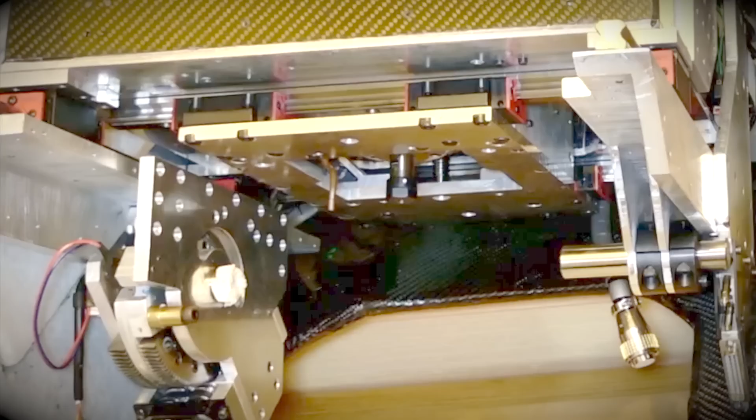Solving the soundproofing box issues, improving the lack of power, and revealing the C-axis performance beyond imagination.

This is bad. It's definitely going to break someday. If we wait until it breaks, fixing it will be a real pain. I need to do something about it now. There are just too many problems.

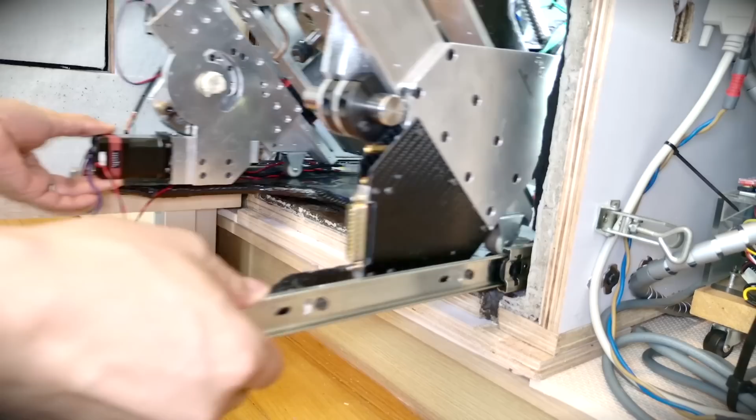Hey, freak. What's wrong? Did something go wrong again? I just love seeing you struggle.

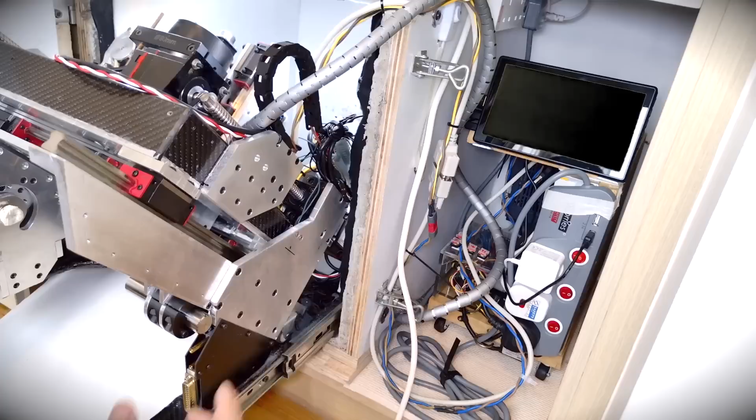Hey, Angel. I've been thinking. I'm a little worried that the slider on the soundproof box might break someday. I found this slider at a local DIY store, and I thought it would be cool if I could use it to pull the machine out of the box. And yeah, it worked, but the machine has gotten pretty heavy, and it's only going to get heavier, so I'm kind of worried. Yeah, it does look cool, but this slider looks like it might snap. How heavy is it? I don't really remember, but last time I checked, it was over 20 kilos.

The biggest column isn't even done yet, and I haven't built the C-axis either. It's only going to get heavier. Plus, my workspace is ridiculously small for building this insanely cool 5-axis CNC machine.

To make the most of the space, we'll probably end up working on top of this slider a lot. When that happens, there will be times when it takes more force than usual, which means it's even more likely to break. So basically, this problem happened because you went ahead without a plan.

Well, that's just who you are. Watching you mess things up is what makes it fun.

No, you've got it all wrong. The viewers are amazed by my flawless work and brilliant ideas. I have the determination to solve any problem and the genius mind to back it up. The word that suits me the least is failure.

Probably. Oh, I see. So, does the genius freak have some ridiculously genius solution? Let's ask Ultimate GPT, the latest AI chatbot I built, for the solution.

Already relying on AI. Didn't we declare that AI a failure in the last video? No need to worry. After the last video, I made perfect adjustments, so now it can provide concise and flawless answers. Now, let me show you the specially optimized Ultimate GPT.

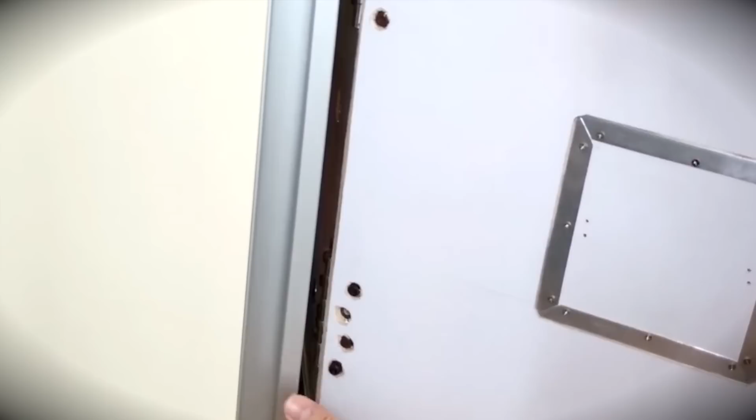Don't worry. My genius ideas are just beyond the understanding of ordinary people like you. It's not your fault. I'm just a genius. Oh, really?

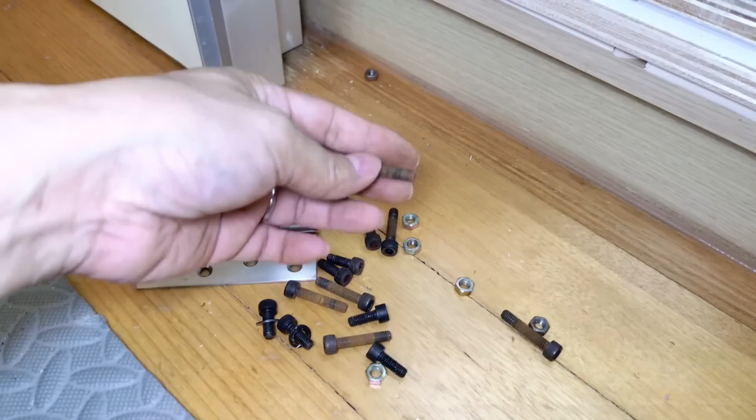Wait, you're making it open downward. Yeah, that's right.

I have no idea what you're trying to do. You'll see soon enough. Just stay quiet and watch my brilliant work.

I'm starting to see what you're trying to do.

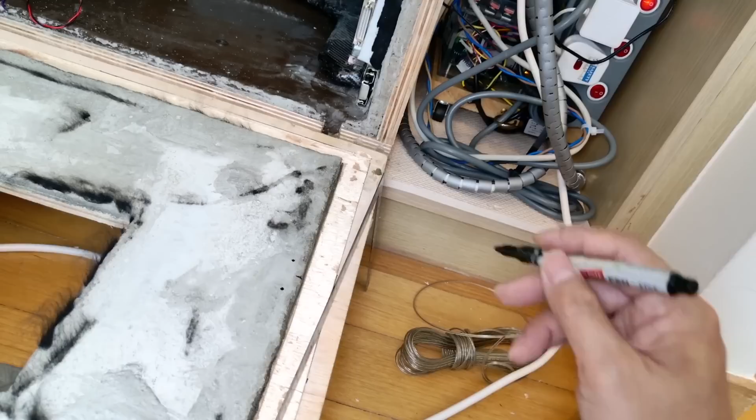Why the creepy looking legs? I've been jogging lately, and I think my legs have gotten more toned. What do you think? Disgusting.

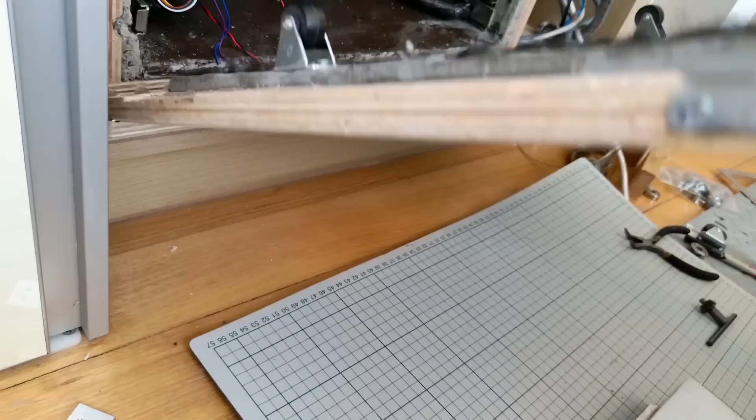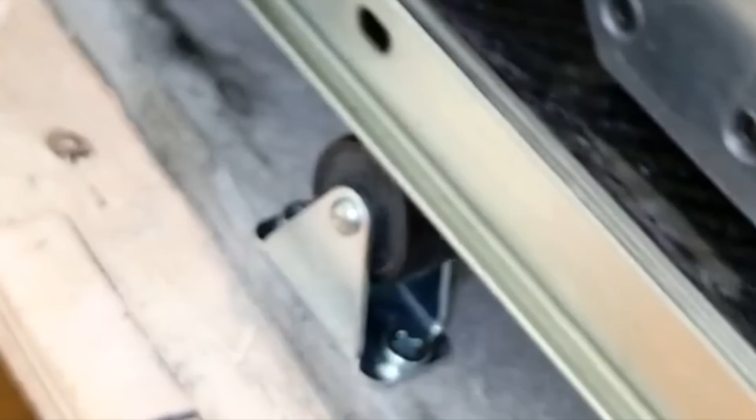It's finished. No one but me could have come up with such a groundbreaking system. These rollers support the slider. Let's run a test. Perfect. Now, even if the machine gets heavier, the slider won't break. Not bad, but it's just okay.

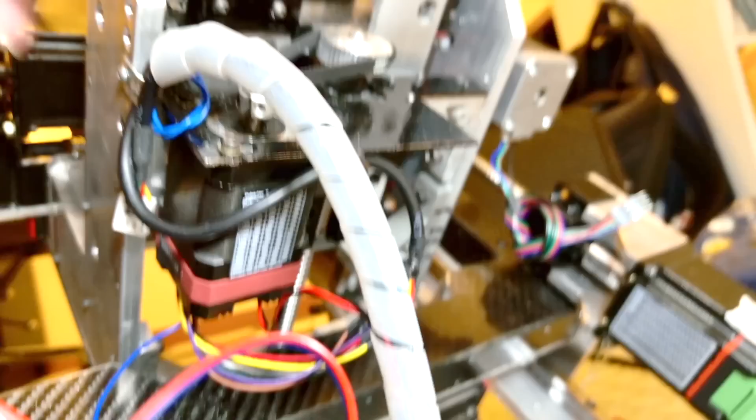Next, I've decided to replace the X-axis and Z-axis motors with more powerful ones. Why did you decide to change the motors? You just finished wiring them last time and finally got them running. Did you already break them? No, I haven't broken it yet.

As for why I'm replacing the motors, I found that the Z-axis motor is underpowered and moves erratically. This is probably because the motor is experiencing a heavy load, causing it to lose steps. The encoder detects the lost steps and tries to compensate, but it doesn't seem to be correcting it properly. Luckily, there's enough space where the motor is mounted, so I decided to swap it out for a slightly larger one.

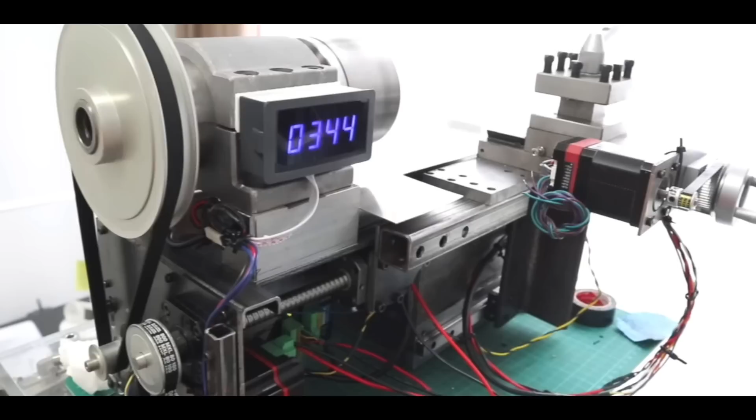As for the X-axis, there's a different reason. Actually, when I built a CNC lathe before, I debated whether to use a servo motor or a closed-loop stepper motor for the spindle drive. In the end, I bought both, but I decided to go with the servo motor.

You just had a bigger stepper motor lying around. Simply put, yeah, that's pretty much it. Besides, there's plenty of space to mount this bigger motor. Using a motor with enough power helps prevent issues. Alright, let's install it.

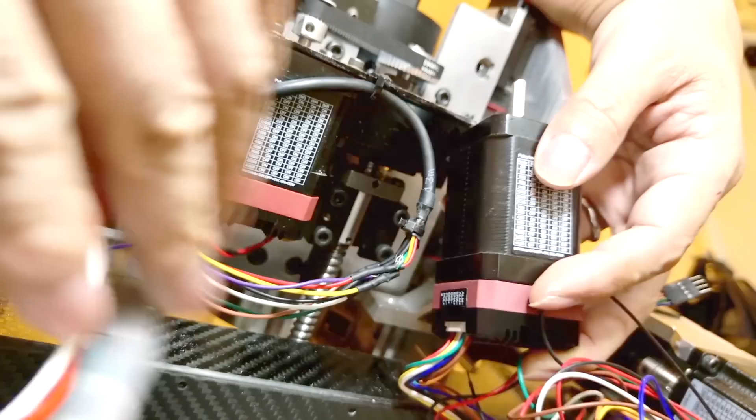Ultimate, explain the stepper motor replacement.

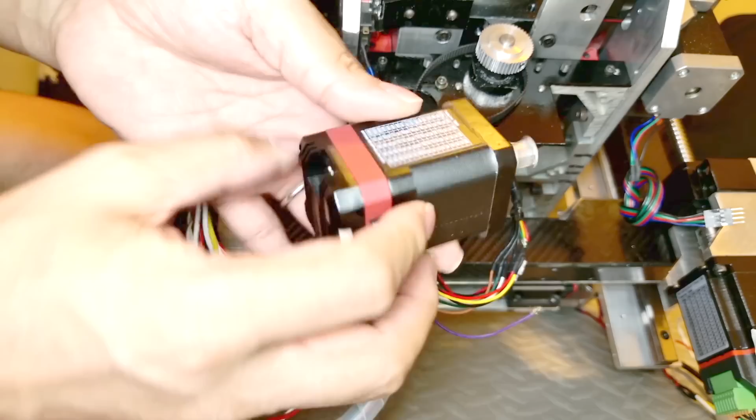Today, we're upgrading from the ESS42P1X48 into the ESS42P2X60M stepper motor. The main differences between these two models are size and torque. The new ESS42P2X60M is 12mm longer at 60mm, allowing for a stronger internal coil and magnet. As a result, it delivers higher torque, making it more capable of handling heavier loads. This upgrade is particularly beneficial for the Z-axis, where load fluctuations are common, helping to prevent step loss and ensuring

Smoother, more stable operation. Thanks, Ultimate. Since it was just a motor swap, there was nothing particularly difficult about it. Alright, let's run a test.

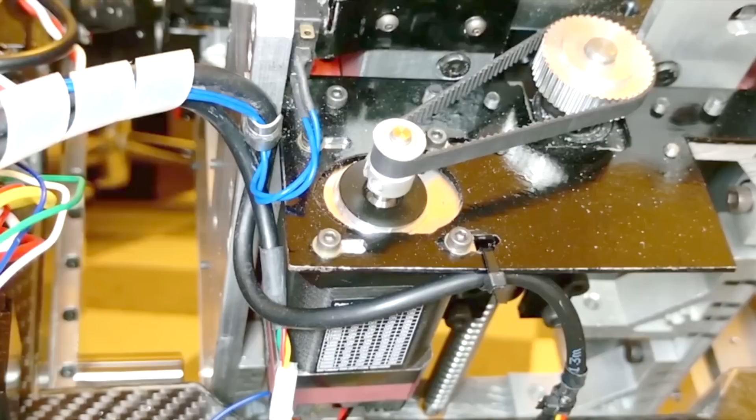The Z-axis seems to be working fine. I think it has enough power.

Next, I'll replace the X-axis stepper motor. This one is significantly larger than the original motor.

Today, we are upgrading from the Hybrid Servo Nema23 closed-loop stepper motor, 1.2 Nm, to the Nema23 integrated stepper servo motor, 3 Newton meters. The key benefit of this upgrade is a significant increase in torque. The new ICE 573630 motor delivers 3 Newton meters of torque, up from 1.2 Newton meters, providing about 2.5 times more power. With a rated current of 5.0A, it can handle higher loads more effectively.

This upgrade is especially beneficial for the X-axis, where fast movements and load changes occur frequently, ensuring more stable and reliable performance. Thanks for the explanation, Ultimate. Alright, let's run a test.

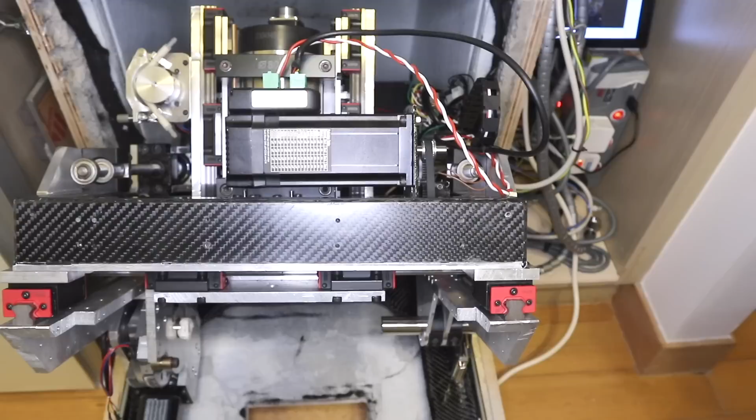It feels really powerful. The stepper motor sounds pretty loud. Why is it so noisy?

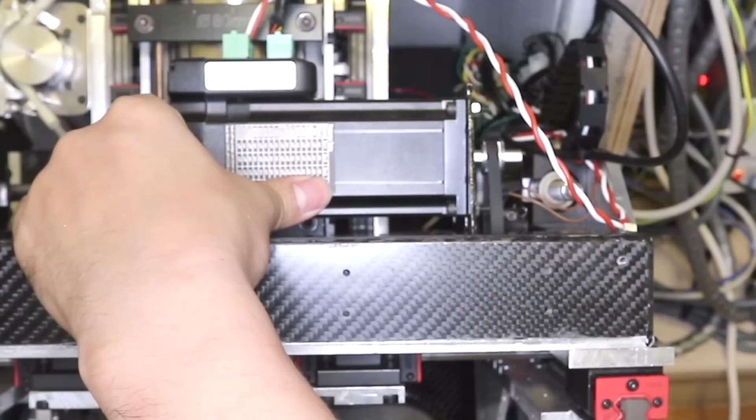There are several reasons why bigger stepper motors tend to be noisy. First, stepper motors inherently produce vibrations and noise due to their design. Larger motors have increased rotor and stator mass, which amplifies resonance during operation, leading to louder vibrations. Additionally, high torque motors require stronger current pulses, which can cause coil and housing vibrations. This is especially noticeable at low speeds, where the motor may produce a grinding or chattering sound. The driver settings also play a role. If the microstepping setting is too low, each step becomes more abrupt, increasing vibration and noise. By adjusting the current settings and gear reduction, the noise can be reduced.

Next, we move on to the most important step in this video, adjusting the C-axis. But before that, there are still some unfinished parts, so I'm working on them now. Where it goes will become clear as you watch. As I'm making the parts, I'll also explain this machine's uniquely designed C-axis.

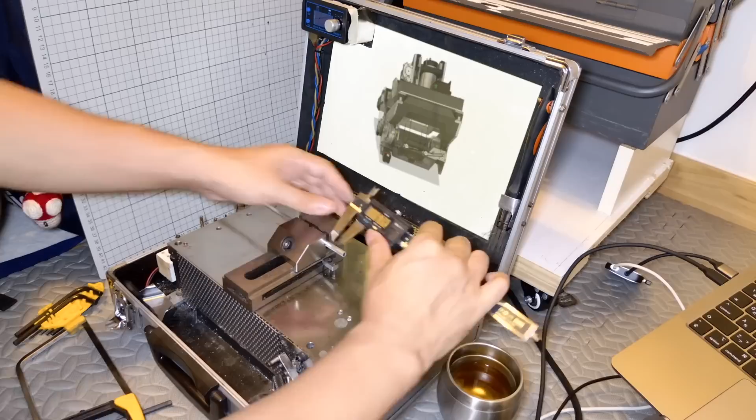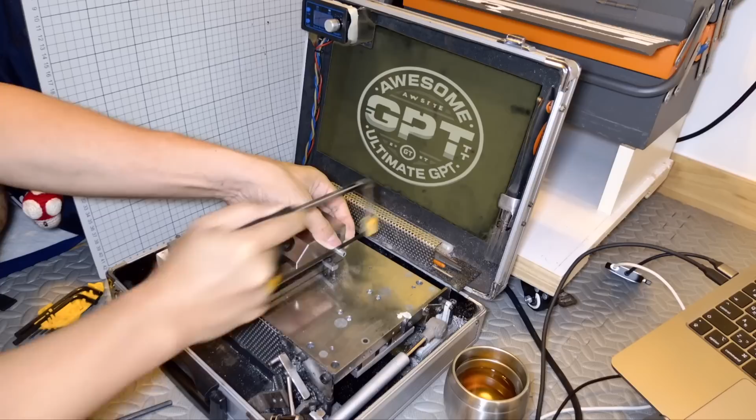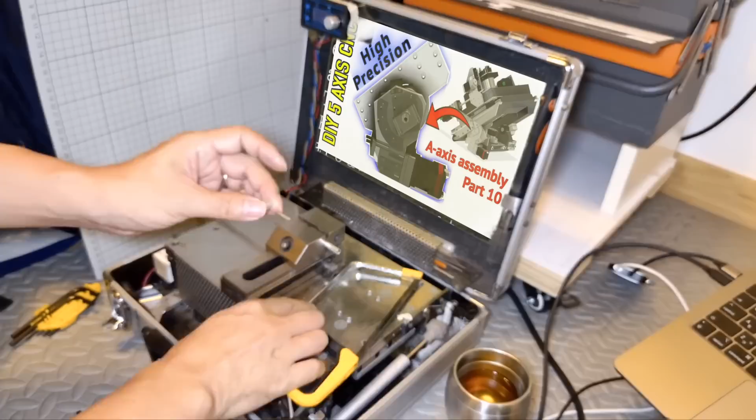Didn't you post a video before explaining the structure of the C-axis? Why not use that to explain it? Yeah, that's right. Looks like you're finally starting to get smarter under my influence. Ultimate, which video did we explain the C-axis in? I've made so many genius videos that it's hard to find. It's not that many, is it, freak? You're just struggling with small text because of your presbyopia lately. Here's the video explaining the C-axis. This is the one where Freak was messing around in the explanation and got scolded by viewers. Shut up. Just stop talking and find a part in this video where we explain the C-axis.

Got it? I'll start now.

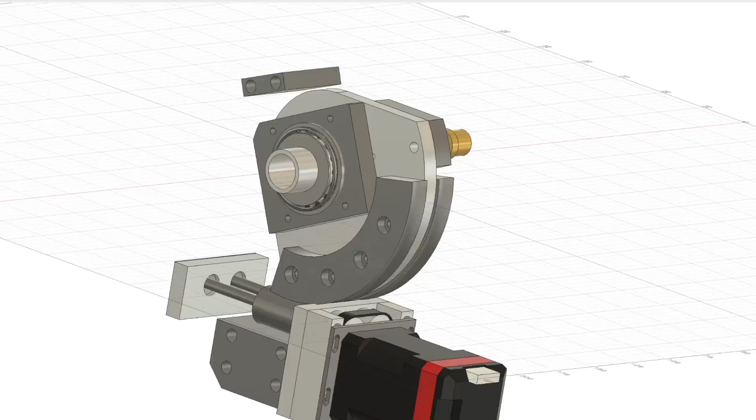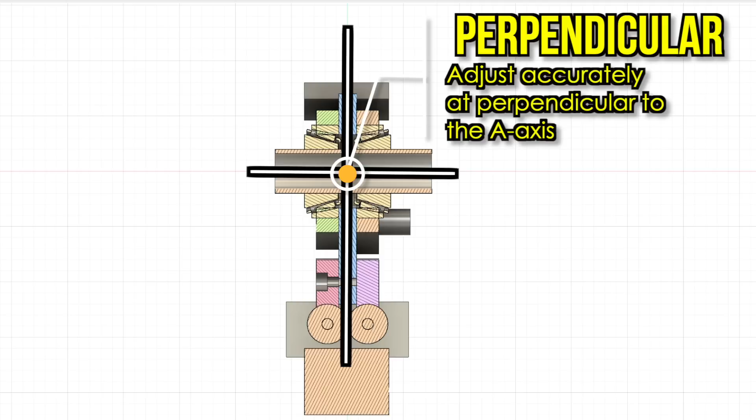This design eliminates backlash by applying light pressure in opposite directions to each other. Of course, each part must be assembled with high accuracy, otherwise it will not work properly. The most important part is the worm wheel unit, to which the worm wheel and taper bearing are attached. The worm wheel unit requires some important adjustments. The axis of rotation of the A-axis must be accurately perpendicular to the worm wheel. The center of the worm wheel must be accurately concentric with the axis of rotation of the A-axis.

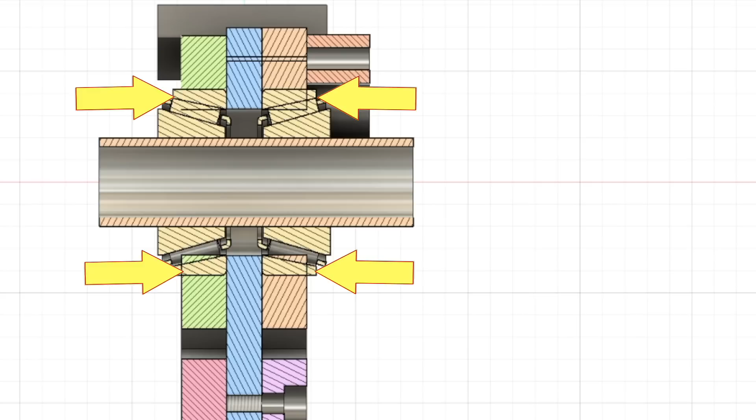The tapered bearing must be press-fitted into the housing to eliminate rattling. Adjust the width of the frames on both sides to give preload to the bearings.

You must not be able to resist wanting to know how I make these adjustments and assemblies with my limited tools and work environment.

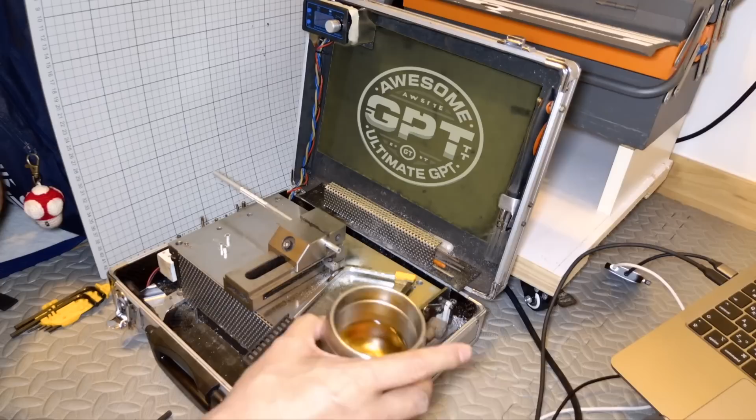All done. Did everyone understand the explanation? I'm a little worried. Perfect. You won't find anyone else in the world who can explain things this flawlessly, except me. I envy my own abilities. If I were to be reborn, I'd want to be myself again. Oh, Freak. That's amazing. I've never seen anyone who can praise themselves as much as you do. At this point, it might as well be a cursed talent. But honestly, you shouldn't say things like that out loud. People might realize you're an idiot. Angel, Freak's brain is half rotten from all the alcohol. You're better off ignoring him. Everyone seems to envy my talent. Let's get back to work before they start messing with me.

The parts I was making earlier are spacers that connect the aluminum frame of the column to the C-axis frame. I've ensured that the tolerance of each spacer is within 0.05 millimeter.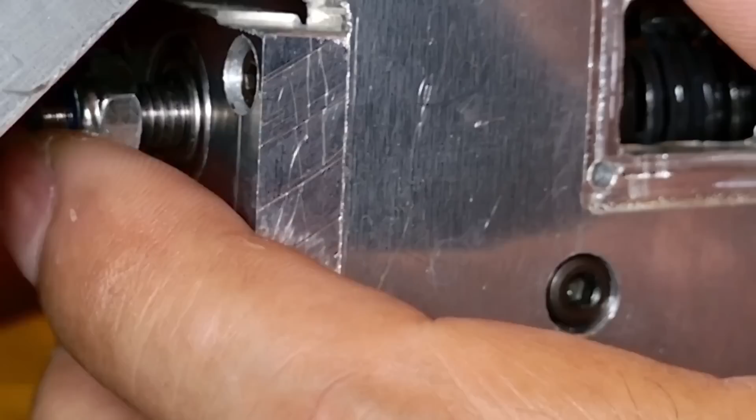Now, I'll start adjusting the C-axis. I know it's functioning, but the real challenge is how much I can reduce the backlash.

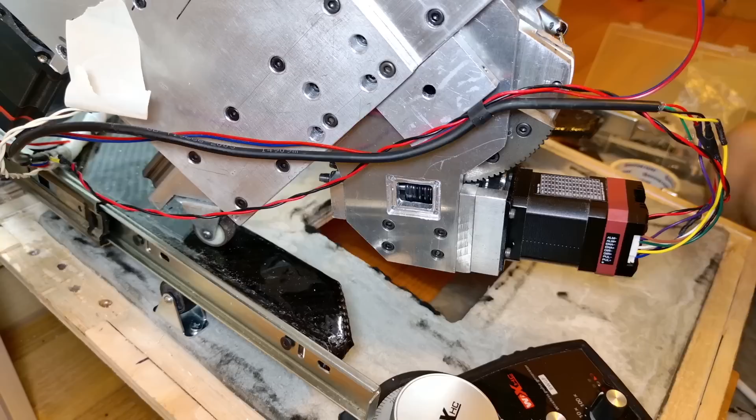This is what it looks like when there's no preload on the worm gear at all. I'll adjust the position of one of the two worm gears to apply a slight preload. If the preload is too high, the resistance increases, and the motor won't be able to turn. On the other hand, if it's too low, backlash will occur, making precise machining impossible.

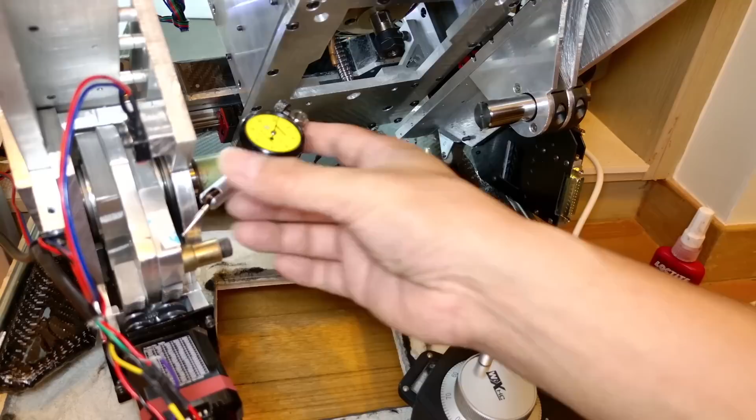I'll check to make sure there's no backlash at any angle.

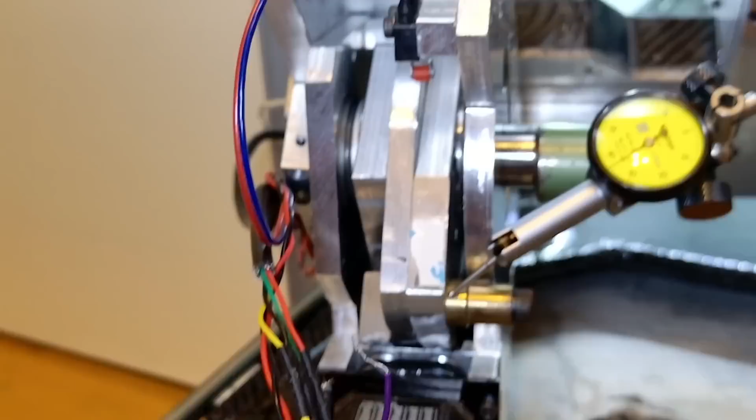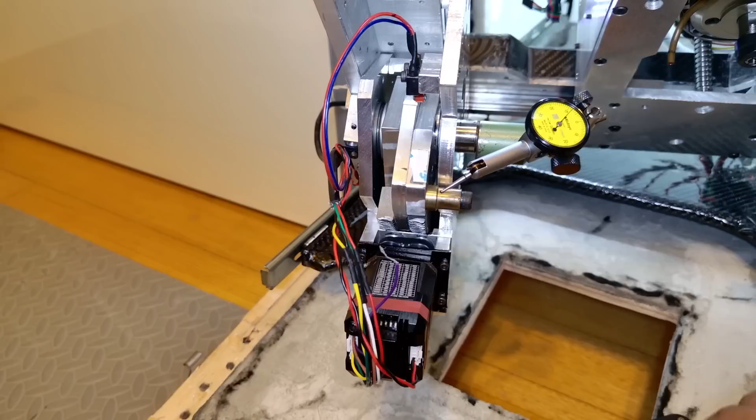If the preload on the worm gear is too high, the motor won't turn and an error will occur.

Actually, there's something that's been on my mind for a while. What's on your mind? It's about what lubricant to use for the worm gear. Right now, I'm using grease, but over time, it gets pushed to the outer edges of the gear. When that happens, it loses its effectiveness as a lubricant, increasing both resistance and wear on the gear. Then why not use oil, like in a car engine? We could submerge the worm gear in oil.

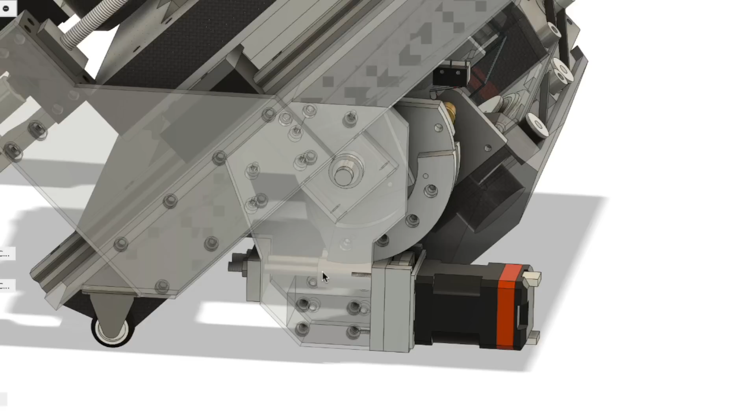I'd like to do that too, but using oil would require an oil pan, and if it's not sealed properly, it could leak everywhere. Structurally and space-wise, it's pretty difficult. Take a look at this 3D model of the A-axis.

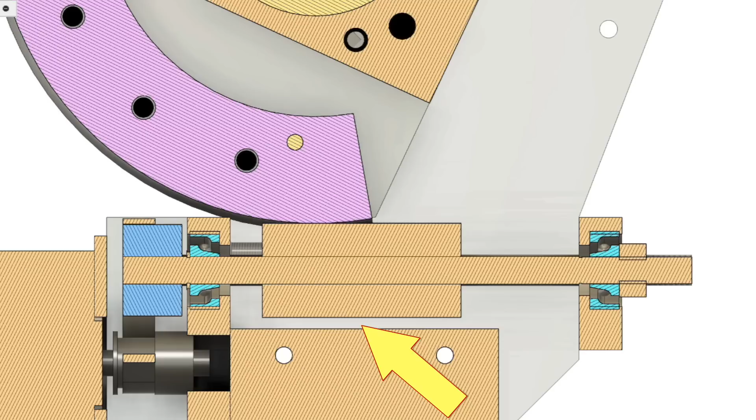Designing an oil pan that encloses the worm wheel and worm shaft would be extremely difficult. Why does it have to enclose everything? Since oil naturally drips down, wouldn't it be enough to have an oil pan just under the worm shaft? Well, you might be right. There's a very small gap under the worm shaft, so I think we could fit a tiny oil pan there.

Here's what it looks like. The gap between the bottom of the oil pan and the worm shaft is very small. In fact, when we actually manufacture and install it, there's a chance they might even make contact.

Since the worm shaft rotates, as long as there is a bit of oil pooled underneath it, the rotation will continuously supply oil to the worm wheel. We only need about 1 millimeter of oil in the small oil pan, so even if it overflows, it would be a very small amount. That should be an acceptable level.

This idea is thanks to me. Thanks, Angel. It's all thanks to you. Let's go ahead and make the oil pan right away.

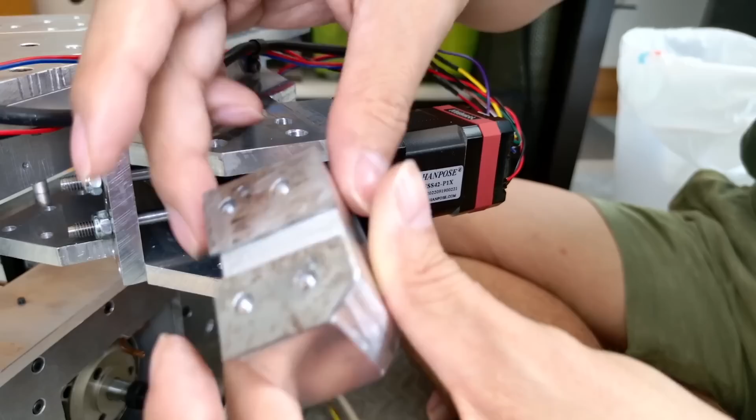I'll make an oil pan the same size as this block.

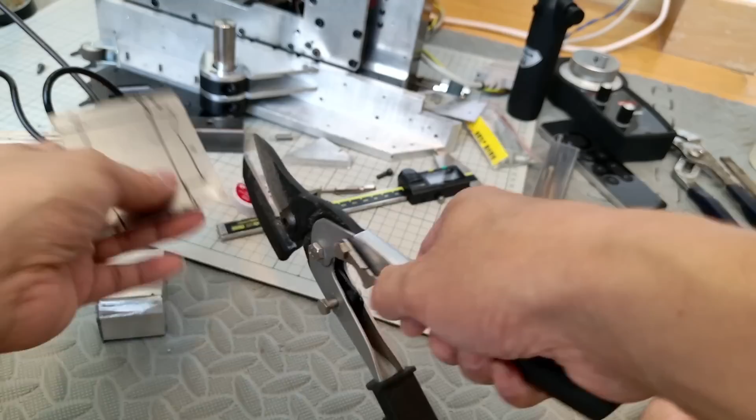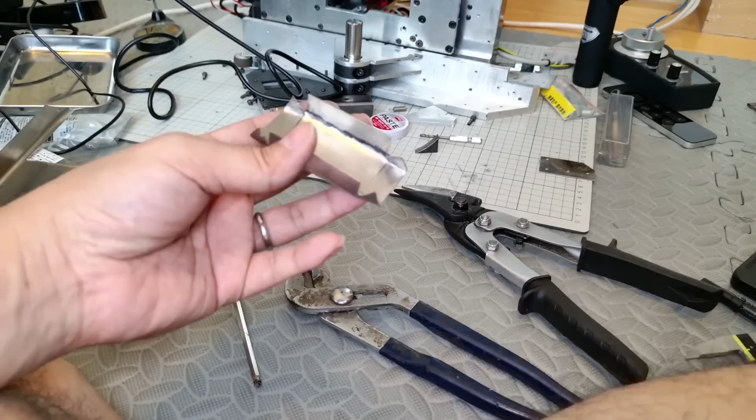The shape of the oil pan is done. But as it is, oil will leak from the seams at the 4 corners. To prevent that, I decided to add a layer of carbon fiber on the inside.

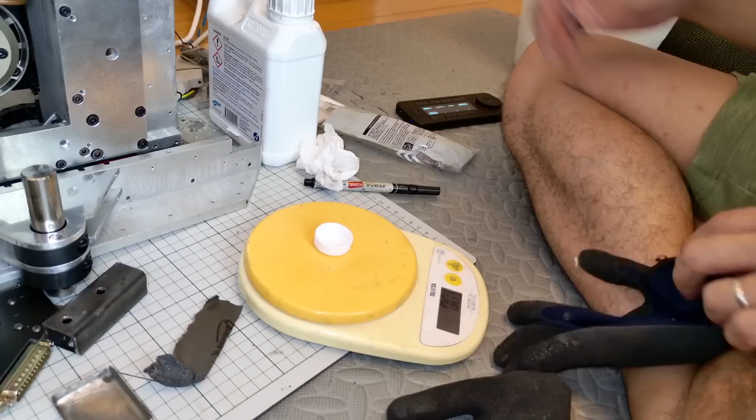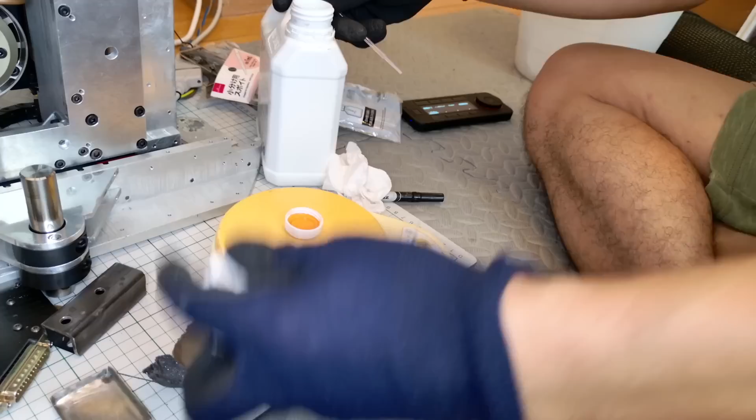Why carbon fiber? You just need to seal the seams, right? Good question. There's a logical reason for it. I want to get started right away, and the materials I have on hand are epoxy and carbon fiber. Plus, it looks cool. So basically, there's no deep reason behind it.

By the way, freak, this oil pan idea was mine, wasn't it? Normally, when someone gives you such a great idea, you'd want to thank them, right? I'm angel. So I can read your mind like it's my own. When you get an amazing idea from an angel as beautiful as me, you must feel like you need to give a proper thank you, don't you? What? What are you trying to say? I already said thank you, didn't I? It's okay, you don't have to say it all. I already know what you mean. You want to ask me what I want as a thank you gift, don't you? But you're too shy to say it, right? What I want is the newly released angel wings adorned with diamonds.

Oh, sorry to interrupt, but this is an important step. This is a method I came up with to easily create a smooth finish on carbon fiber. If you don't do anything, the surface will harden with bumps, and leveling it afterward is extremely difficult. So, I apply a layer of clear tape on the surface. Once it hardens, peeling off the tape leaves a perfectly smooth finish.

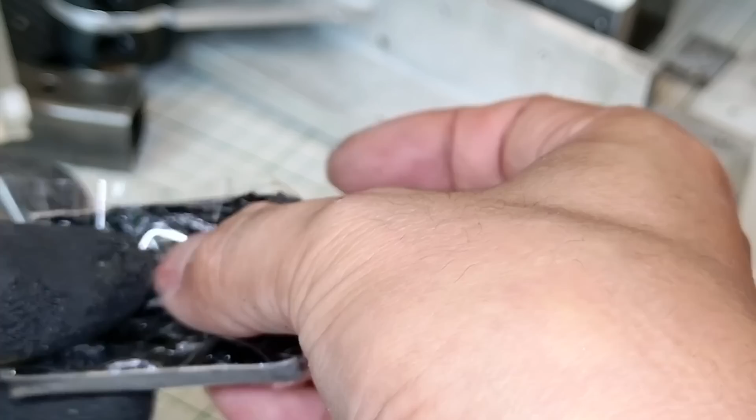That's an interesting technique. I've never seen anyone do this before. Angel, haven't you forgotten that I'm freak?

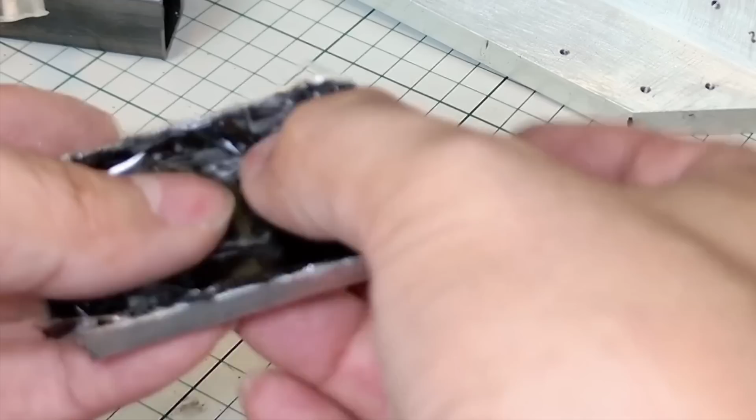With the tape applied, I can press it with my fingers to adjust the shape of the carbon fiber. Plus, since the tape is transparent, I can check if there are any gaps inside. How did you come up with this method? I failed a lot, tried different things, and discovered it by chance.

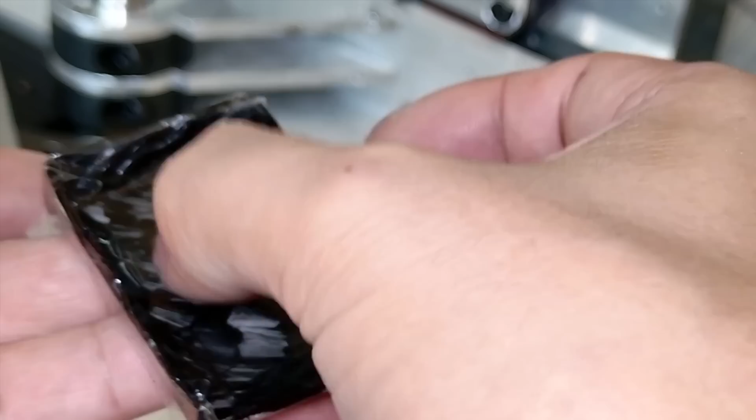After a day, it is fully cured. Now, I'm going to peel off the tape. It'll remove the excess carbon fiber. It looks pretty good. For such a rough job, this turned out surprisingly well.

To check for leaks, I'll pour in some water. This size is perfect.

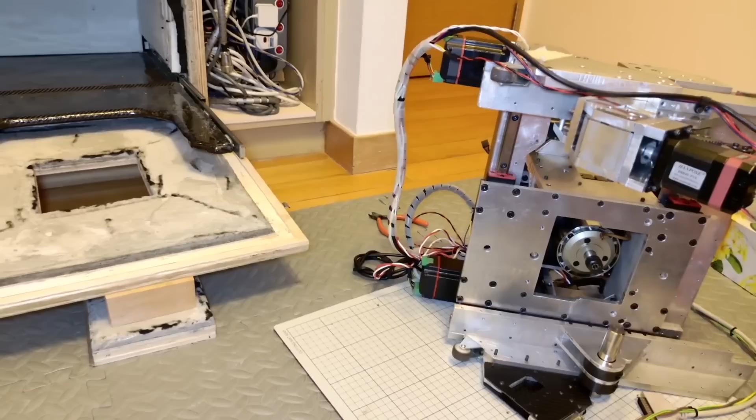I'll use this lubricant. The amount needed is very small. With this little, even if it overflows, it shouldn't be a big problem.

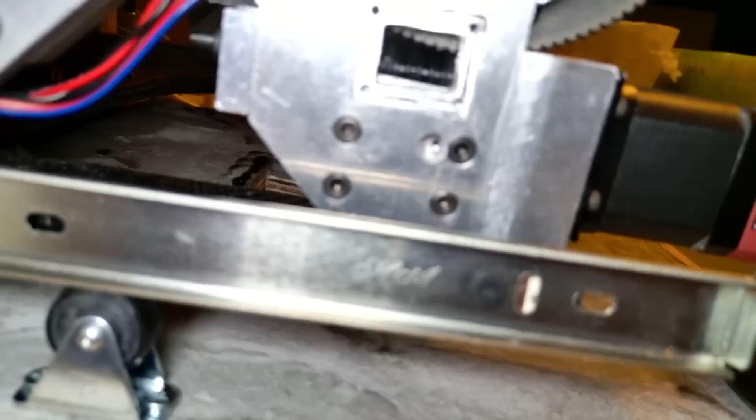Is this little really enough? We'll see when we try it. If it's not enough, we'll add more.

I can see the oil being lifted in the direction of rotation. It looks like lubrication is circulating with just a tiny amount of oil. It's working even better than I expected.

This is working amazingly well. I must be a genius for coming up with such an idea.

Hey, freak, about that thank you gift. What I want is the diamond angel wings.

Look at this. You can see the worm shaft lifting the oil and circulating it all the way to the worm wheel. Amazing. That's impressive.